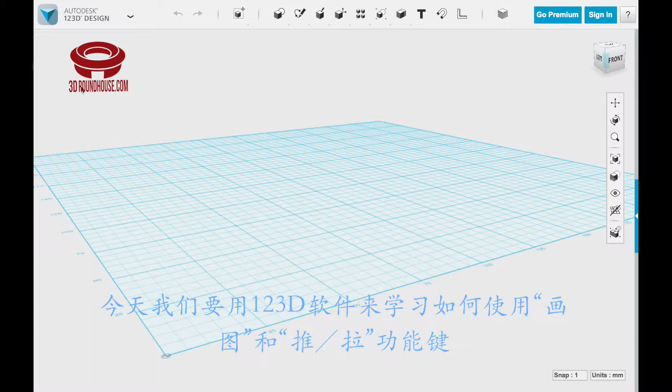Good morning everyone. Today we'll be covering the sketch and extrude tools in 123D design. So we'll be using the sketch tool, and we'll also be using the extrude tool to create the object, extrude, and we'll be using these navigation tools: pan, orbit, zoom. We will create this table that you see here.

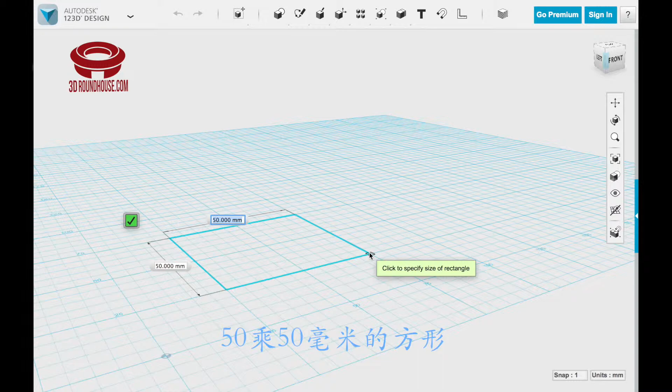Let's begin. We begin by clicking sketch and clicking the sketch rectangle. Now, even though it says sketch rectangle, we're actually making a square for our table. It says click on the grid, so we're going to click on the grid and click the first corner, drag it out. We're going to make a very simple 50 by 50 millimeter square. I hit click and it says click to specify size of rectangle.

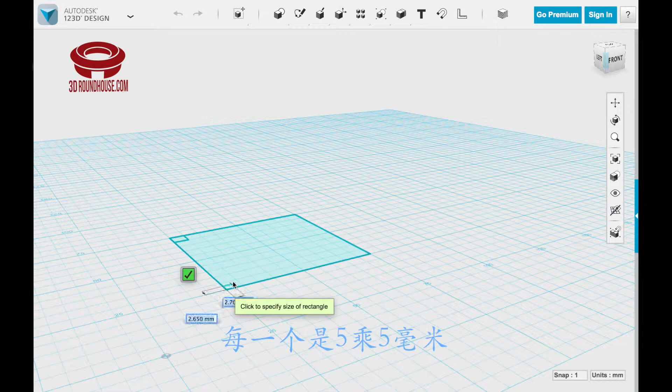So we're going to continue using the sketch tool and just draw our corner legs, 5 by 5 millimeter each. Click and click and click and click. I hit enter to complete the process.

I zoom in and as you can see, I see a surface for the table and 4 legs for the table. Next we're going to apply the extrude tool. We click the table surface and we click extrude.

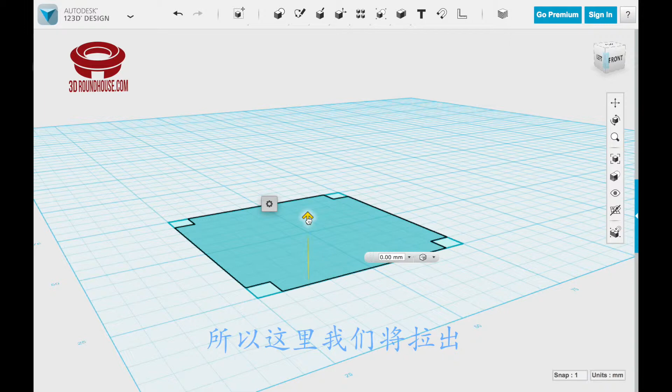With extrude you can create 3D objects from 2D faces. So here we're just going to pull this up to 5 millimeters and hit enter.

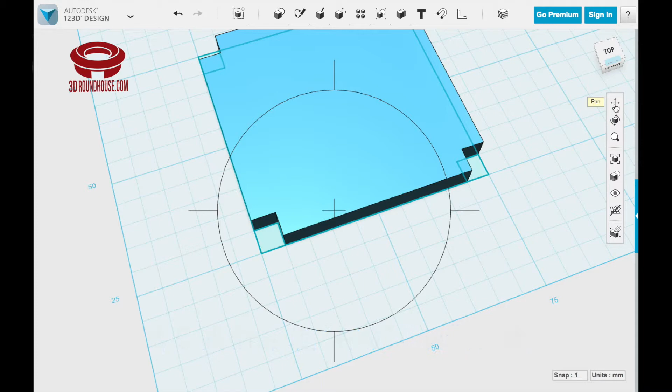To create the legs, we're going to angle this so that we can actually do all 4 legs at the same time. You saw how I used the orbit tool. I pan over, orbit a little bit more, and I'm able to see all 4 legs.

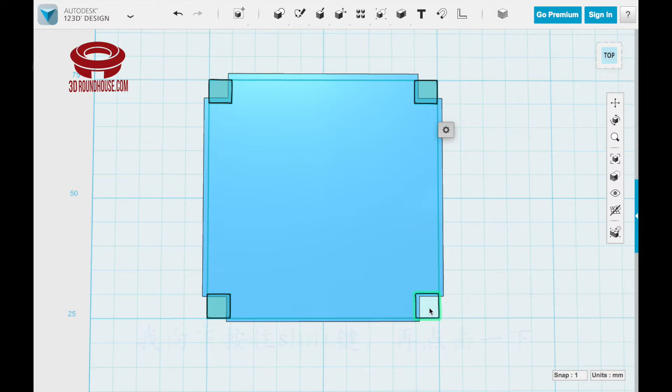Now from here I can highlight each leg. I click, I press down the shift key, I click again. You see 2 legs are highlighted. I press down the shift key, I click again. I press down the shift key and I click again.

I orbit back to an angle, zoom out a little bit. Now this gives me a shortcut for the extrude tool.

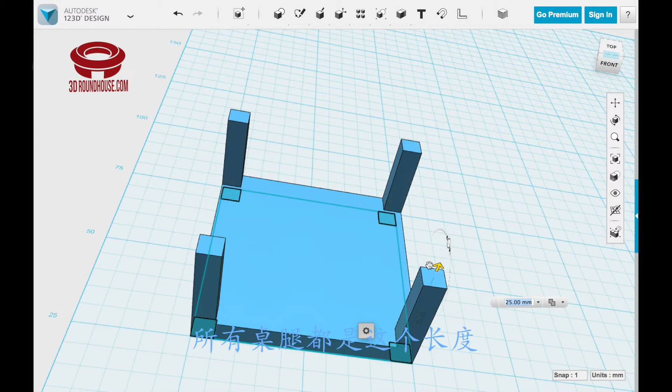So I click extrude and it gives me this arrow. I pull the arrow up and let's just put it at 25 millimeters. And you see all 4 legs go up by 25 millimeters. I hit enter.

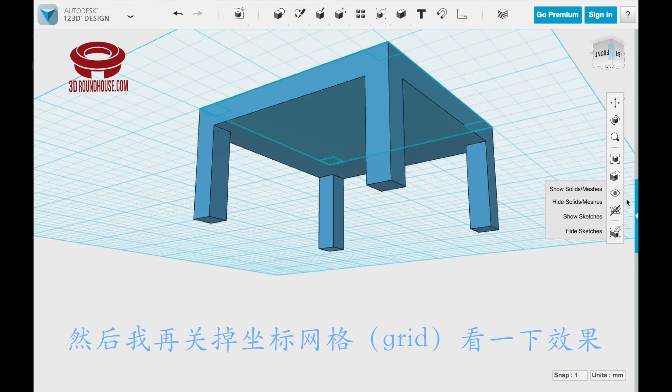And I can orbit. Let's orbit a little bit more. I hit escape. I'm going to turn off the grid, and there you have your simple table.